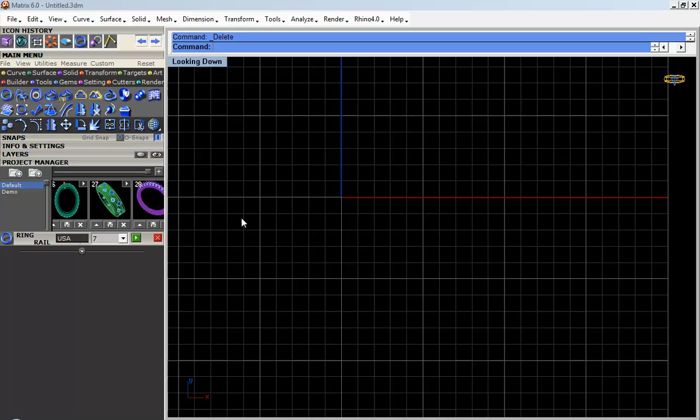Get a rail outside as usual, always a bigger one. This is too big. Alright, no problem. Okay, and one more. That's it.

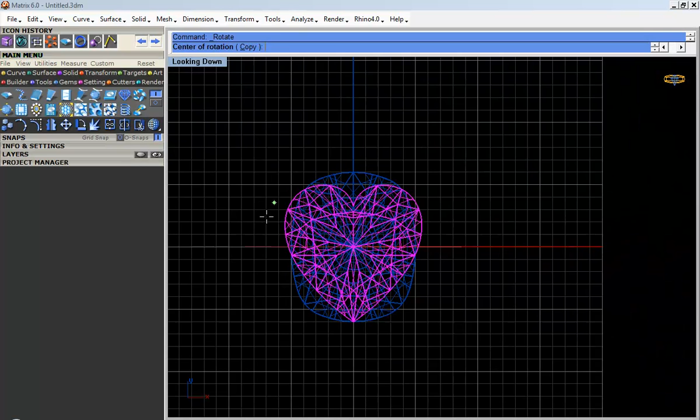He told me you will transfer the machine tomorrow morning. Yeah, in the morning. So for me, I would prefer to go now. I have nothing now, and I finished my job. So I will just get my stuff and I will go. I'm gonna move this.

To send the machine? Rotate them.

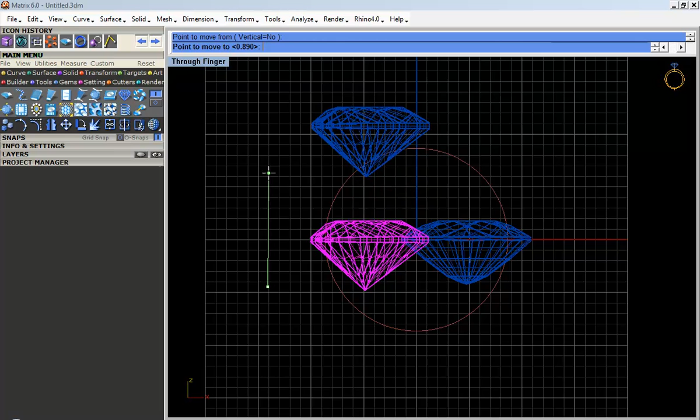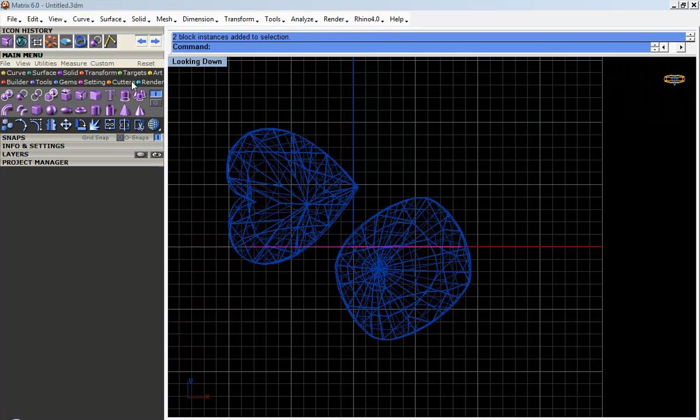I'm gonna extrude them. I heard that he said, what you do? I'm gonna extrude the curve so I can get a guideline, this one also something, like how I'm spacing them equally or not.

Now I'm gonna get a profile curve for this diamond.

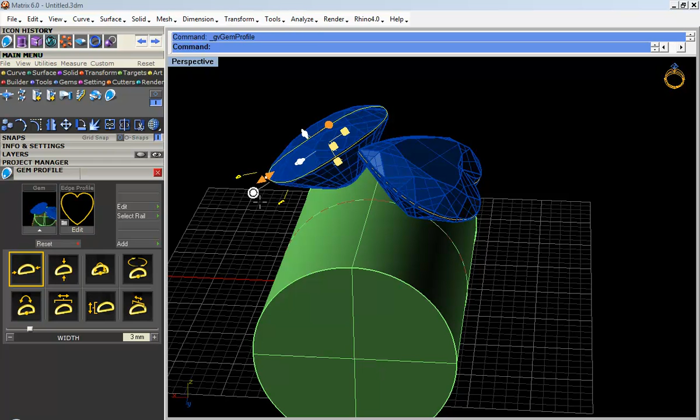So now you're gonna select the curve.

Alright, I got the curve, so I'm gonna select them. Go in view. It's complicated, right? It's much more complicated than that. Yeah, of course, I will say the better.

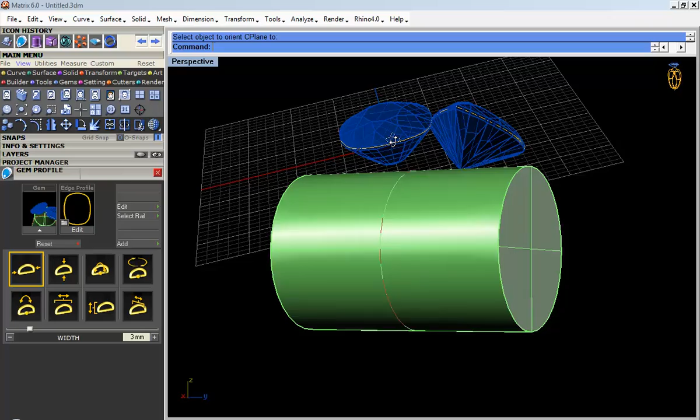Alright, they don't have the command over here, so what we can do is we can go over here. We have this Set CPlane option, yes, okay, and you set through object, set CPlane to object, and I'm gonna select this curve as my object. So what it does is set the CPlane, you see the CPlane has been moved from the middle to the flat object.

Alright, so now I'm gonna select this one. I'm gonna rotate it. It's a very nice thing if you just follow this. You're gonna offset it 0.1. Alright, wireframe, select, offset it outside 1mm, or let's say 1.1, let's take 1mm. That's nice.

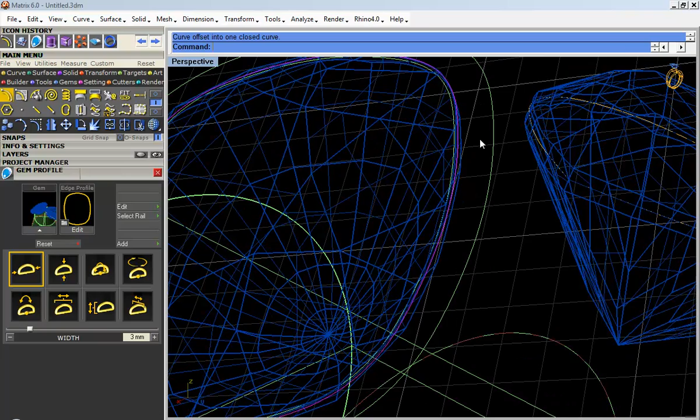Now I've made 2 curves, right? 0.1 inside and 1mm outside. Now I'm going to do the same thing over here for this curve.

Select it, view, set CPlane to object, okay, and now it's going to change the CPlane from here to there. I'm going to do the same thing over here. Offset inside 0.1, enter, and select the inside one and offset outside 1 millimeter. Okay, so you get two curves like this.

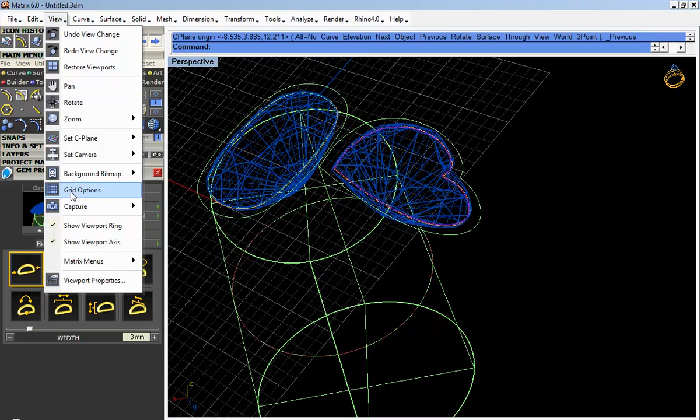Now I'm gonna go in view, I'm gonna go in Set C-Plane, and I'm gonna press this button, Undo CPlane Change. So it's gonna get, yeah, exactly. I'm gonna do it twice because I changed it from here to here and from here to here. So I got this back to the 0 level, and now I'm gonna use a curve.

Alright, and from here I'm gonna use this one. I'm gonna use... alright, I'm gonna select this one, and you see the shank shape, you need to modify them again. Alright, I'm gonna make it half, and now...

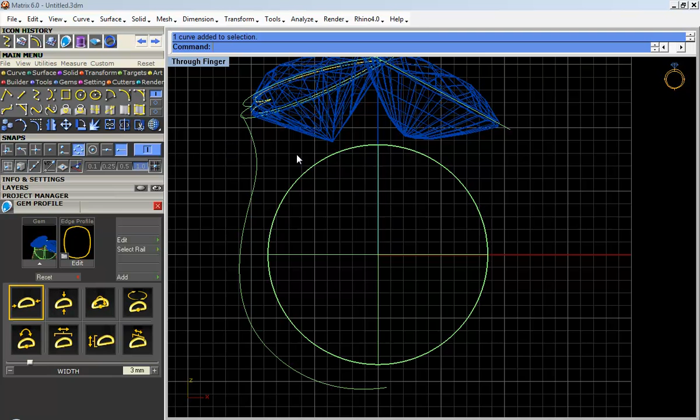Let's use this one and get one outer side one. Yes, so you can use them as a guideline. 1.5, and you can delete them exactly. That's a good idea, you know. You think about it when you just try to make them, and then you get an idea. Let's try this. Alright, so this is nice.

I'm going to use this one, get some points on it, and I'm going to move it to match it. Okay, so the good way to get the shape properly is to get the points on the curve, not off curve. It's better to use this one, so it's gonna get us exactly what we need.

Alright, yes, like this. I think it's good. What do you think? Yes, it's fine.

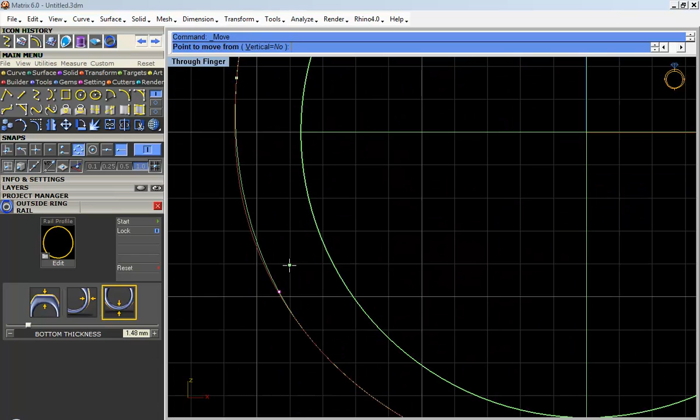Alright, so you have done over here, now escape so I get rid of the curve. I'm going to mirror it to this side, and match this over here, move it to the quad. Alright, something like this, undo.

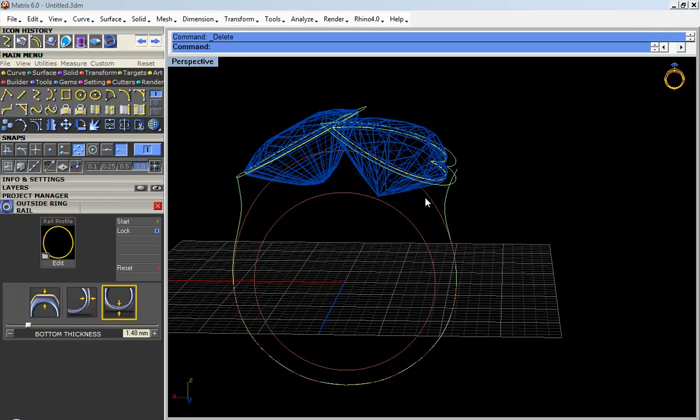Alright, now have a look from here. This is what you got. Okay, so I don't need them anymore. I'm going to select and delete this one. I'm gonna lock it, or let's say I'm gonna delete this one. Doesn't make any sense to have this one. Alright, now...

Select sweep one history, select this, and you see when you do this one, with the history I got something funny, so I'm gonna undo this one, select it, undo. I'm gonna use the normal sweep one, not sweep one history.

Sweep one, select this, and I'm gonna use this option, road like through finger preview. This is because it's taking a turn from here. If you see over here, that's the reason, so not a problem.

What we can do is we're gonna project both of them, select, and say project to CPlane. Alright, this is here, you need to type them, use this view. If you're doing this view, you're gonna get flat because the CPlane over here is like this, and the CPlane over here is like this, so I'm gonna go over here and type no.

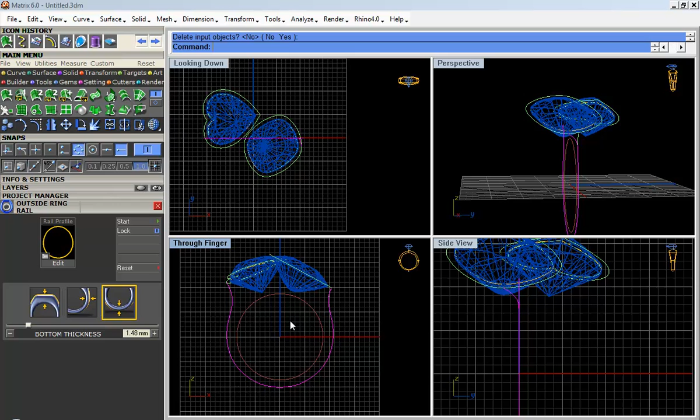Alright, so I've just pressed enter. Type no. Yes.

What is the projection of CPlane? The projection of the CPlane, right now it's not straight. So when it projects to the CPlane it's always planar, you know, flat. So they're gonna make them flat, right? That's what I've done over here. Select them, right click, and say yes.

This time you delete them and you got a new one. You see those are flat, it's flat. If you see them, they were like this, now changed them like this. Alright, now select...

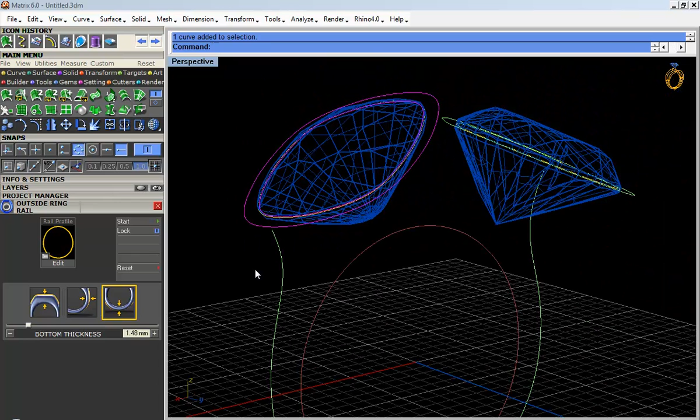This two inside and rebuild them, because I said I don't like the points of the matrix, so I'm going to change it to mine, to 0. Review, yeah, they're looking better. Okay.

Select this and this - oh my god, I didn't see this one. You don't have to get this. How do you select both of them together? Press shift, shift - you press one on one and then you press shift and take the other one, right? Yes.

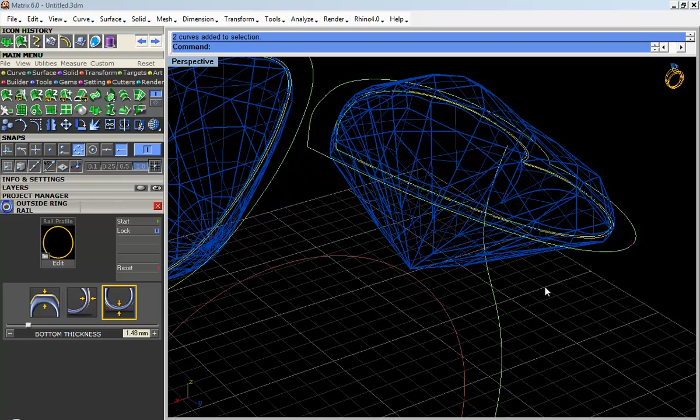Select over here. Okay, now extrude them, because I have an edge over here, so I need to extrude them. If I don't extrude them and if I try to rebuild them, it's gonna get me something very bad shape. So I'm gonna lock all this, lock my diamond, delete this one, the gem profile, and...

You see it's all separated in different curves. So I don't know where is the shortcut of locking things. Locking, Control L. Control L. Huh? Yeah.

Select this section, join them as one. Alright, but seems like it's been joined into two because of this one. Alright, so select this section, sorry, and select. Yeah, select this, you see it's going from edge to edge. It has to be one, edge to edge.

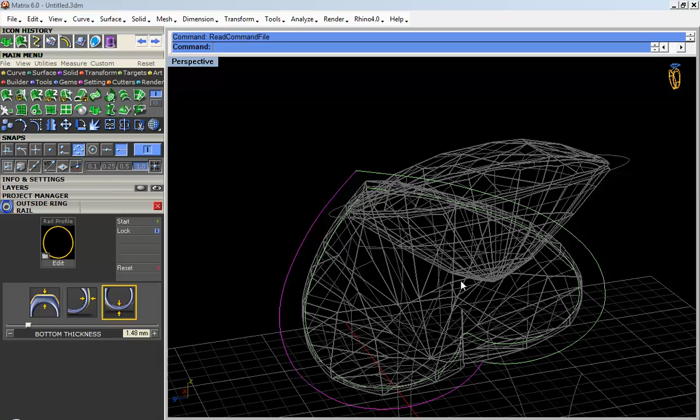Always remember, join them, rebuild them. Sorry, we do the rebuild at the same time. So right now, let me take this as one section, unselect this, select. Yeah, okay, so till here it comes as one. That's nice. So I'm gonna unselect this, I'm gonna make them one.

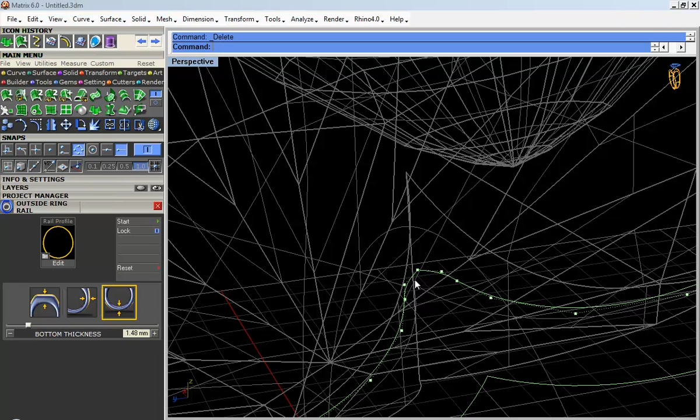And I'm gonna select like this, unselect like this, and join them as one. Alright, so I'll delete some points over here so I don't mess up with them later on. Get some points, delete this too. Alright, I need a sharp shape, that's why I've deleted some points.

So I'm going to do the rebuild for all the 4 curves. Okay, let's take 12 and just see if it changes the shape. Alright, so this is okay, you press OK. You see now it's been changed into sharp, that's why I've deleted these 2 points. Alright, and I'm going to join them as one.

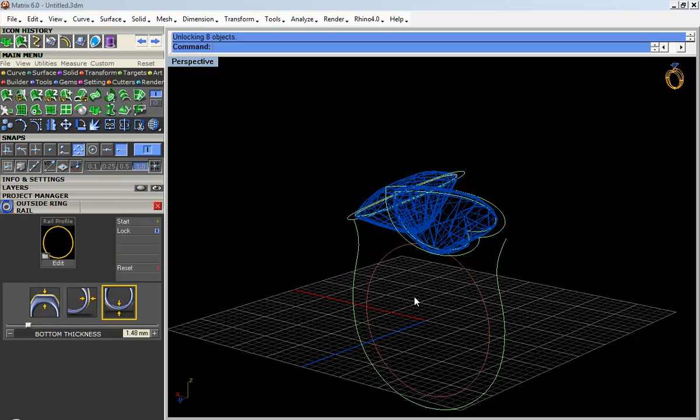Okay, so I've joined them as one. I'm going to unlock my design, everything, and now I'm going to do the sweep one. Select. Alright, so before I do a sweep one, it's good to have...

I need to trim them. Trim. Okay, no good. I'll make one line, curve F4, curve F4, straight, select this one, trim. Alright, delete, join, get some points, or you can rebuild it again with 16.

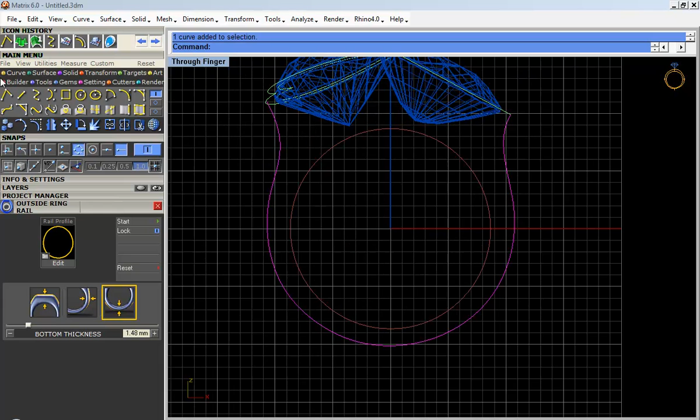Alright, so whenever you do a rebuild, it's gonna smoothen your curve. So rebuild is a good option to do. Curve, get one circle with 2 points, through finger, this view, use the quad, select the quad, and just make a circle with no dimension but a smaller one, because we're gonna need them with the sweep one option.

Surface, sweep one, select here, and then you press enter. Alright, I missed the down one. Select, select, select, and select.

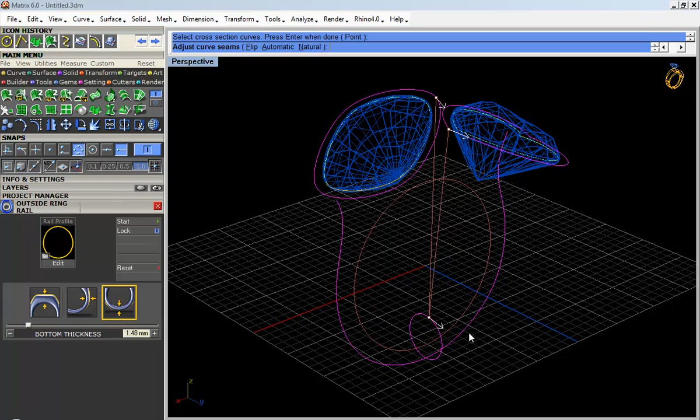Alright, so this is how it's gonna come. It's gonna come in this way, facing this direction. When it comes over here, it faces this direction, and it goes over here, it faces this direction, which is perfectly alright. You're gonna learn them more when you try to do sweep 1 and sweep 2. When you go with the sweep 1 and sweep 2, you understand them more.

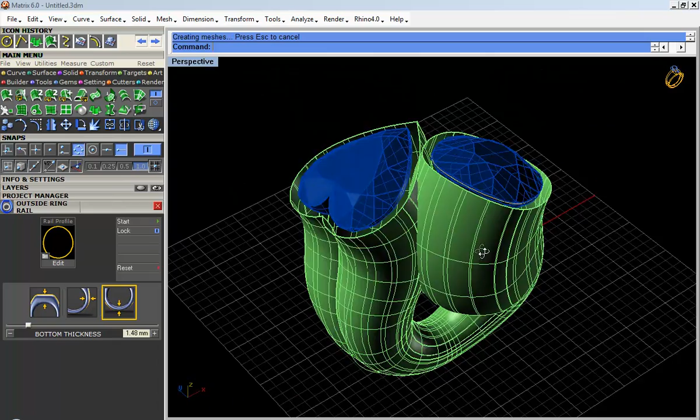So if you think it's not the one which you wanted, you can even do a sweep 2 over here. Alright, but this is not how you're gonna do it. You're gonna cut them like this. So you're gonna have like this one, you see?

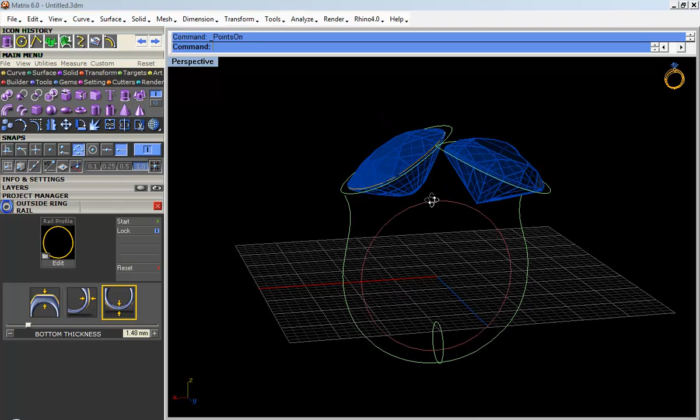Alright, so if you think the shape over here is not good, then what you can do over here is, I'm gonna undo. Alright, and then I'm gonna make a second curve.

Okay, we're gonna try now with the sweep 2. Let's have the other curve. Make sure the points are on. You're registering now? Yeah.

We don't need them. That's a good shape. What's doing now? Yeah, I'm gonna show you.

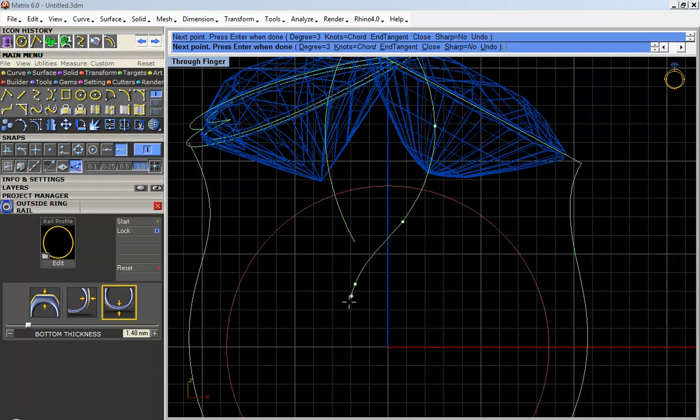I'm making the outer shape for the shank. Different? Yeah.

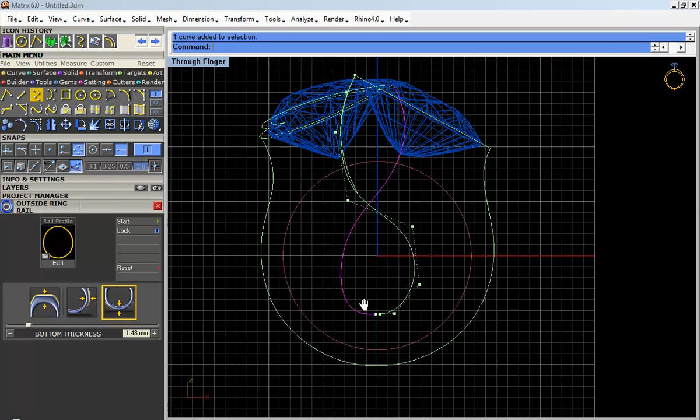Now I'm going to do a sweep 2 for this 2. I can even break them into 2. Select this one, split. So I split them.

Okay, split what? Split this curve. It was 1, so I split into 2. So surface, sweep 2, 1, 2, 3. Select this as 4. Alright, and this is what you get. It's nice. Okay, it's okay.

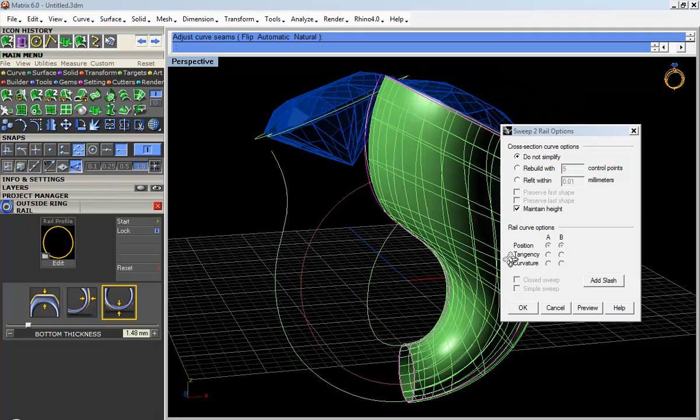If you want to add slash, you can add a slash. What do you mean add slash? Yeah, I want to show you. So this is how it's gonna improve your shape, you see? You press enter.

Alright, I'm gonna do the same thing over here. Select this, select this, and the other one, and this one. Alright, you can see from here you can add this slash. Alright, and that's it.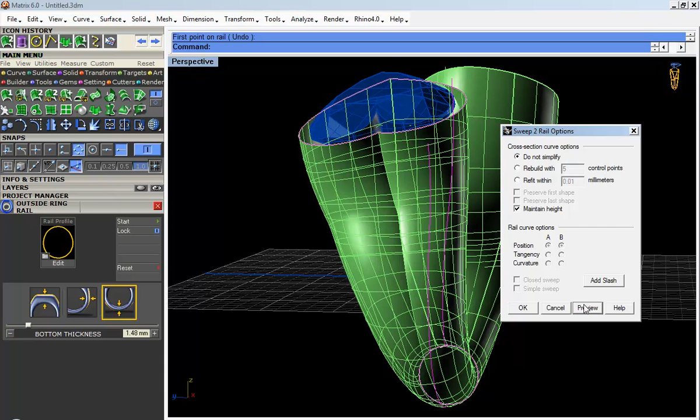Okay, I think adding the shank preview, no. Alright, let me do that again, because when I press the Add Slash, the design was changed a bit. And so I think it's okay if you do not add anything over here. It's gonna be fine. You say okay.

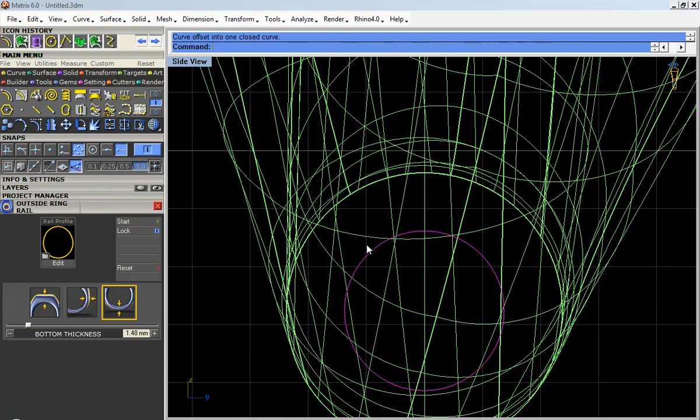Alright, so I'm gonna do the same thing again. I'm gonna offset 1mm, right? Rebuild. You know what, I made a mistake. I didn't rebuild this curve. Alright, I need to rebuild this also, so I don't get them into pieces when I explode them.

So it's as I said always, if there is a smooth surface, the degree should be 3. It was 2, so I made a mistake, so I'm going to rebuild this now. Okay, I'm going to do the sweep 2 again. So these are the things you need to take care of.

Alright, 1, 2. Alright, okay.

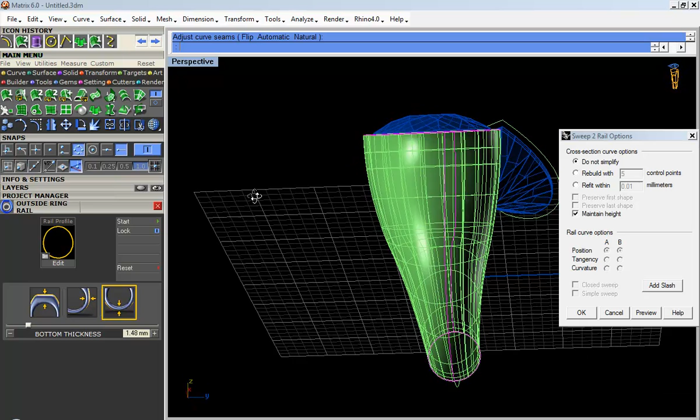Let's try to add a slash. Where do you get that Add Slash from? It's in the option, and it does not... What? Just you pull it, the stuff. You pull it up and down? I'll show you, but it's not going good with the Add Slash. So let's do without the Add Slash.

Select this. Select this. All right.

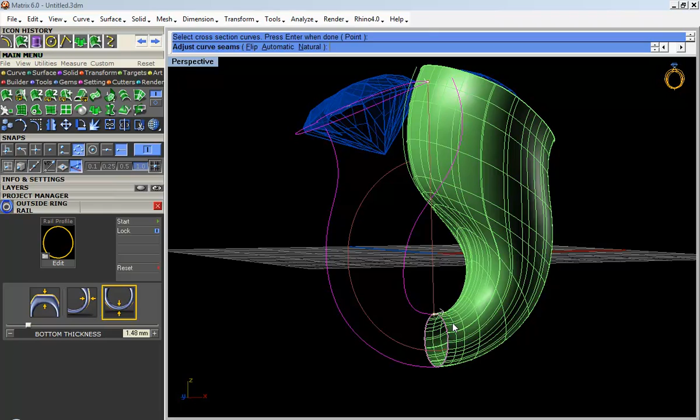Okay, now what I'm going to do is I'm going to get one more curve, offset, curve, offset.

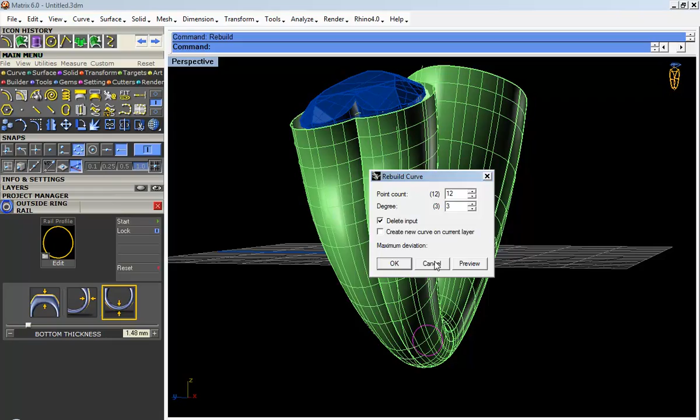Change the layer. You can have more layers down this side. Okay.

I didn't understand that loop that you made inside, for what? Yeah, that's because we have one more curve over here, right? Inside, remember we did the offset inside, so that's why I took this one. So I need one more curve for sweep 2 for this one, this inside one, because I'm gonna do

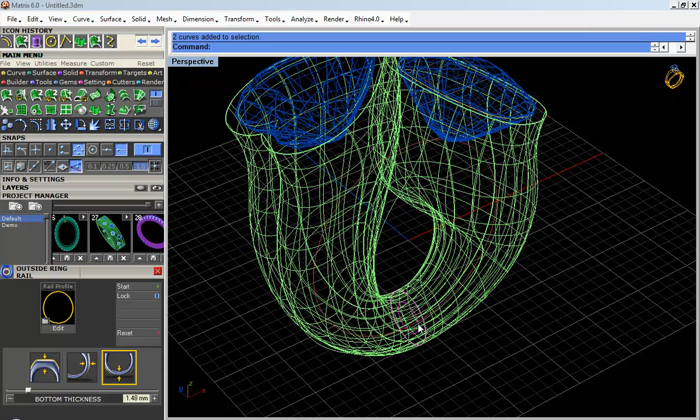again one sweep 2. I'm going to do sweep 2 again, so I need a curve for this one which is inside. So I made one more curve which is inside this one, so they're gonna maintain the thickness of 1 mm. I understand, right?

So sweep 2... Guys, this is your lunch. You select this. Yes, spicy, thank you, thank you. You're gonna select. You want anything to drink? No, thank you. Coca-Cola, later.

Tea, later. Select this one. Which one? The curve.

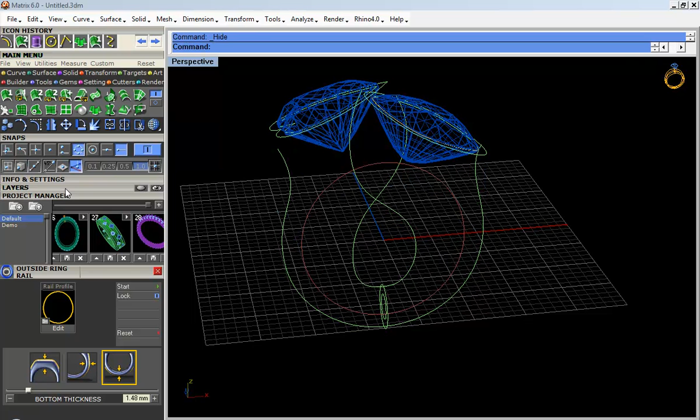Alright, right now I'm getting disturbed because of this, so I'm gonna hide them. With what? Hide. Okay, and then sweep 2, 1, 2,

3. This is my section and this is my section over here. Yes, and I'm not doing anything, no slash or whatever, just okay. Alright, okay, I'll do the same thing over here.

1, 2, 3, and 4, the inside one. Okay, this one. Yes.

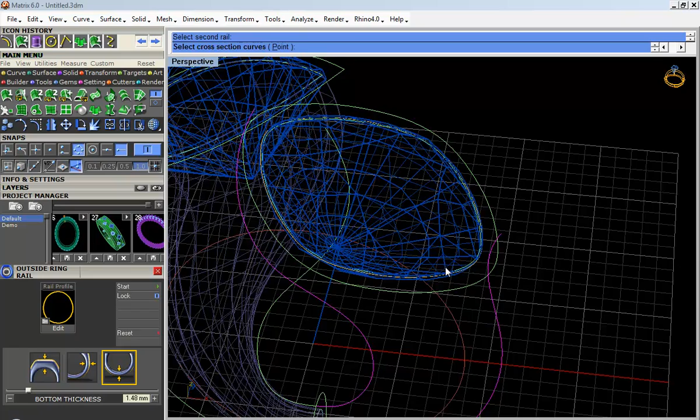It's my mistake, I didn't press it properly. Select this properly, and properly. Okay, you didn't do the okay. Alright,

that's it. Join them together. Join it to what? Join these two surfaces together. With what? With the join over here, with the join.

But you pushed only the thing. Control J, that's the shortcut. Okay, I'm gonna hide my object, my ring. She's over here, and I'm gonna also join them together with this join over here.

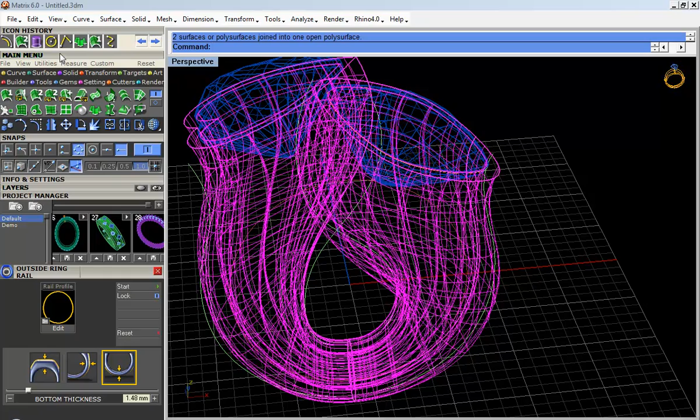Alright, now you can cap it. The cap option. Okay, cap? Yeah, cap this two surface, those were open, you see,

they are open. So I'm gonna cap them.

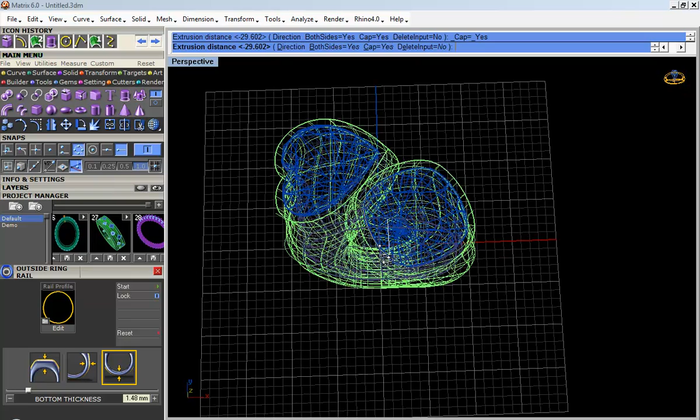Now let's see if this gonna do the Boolean, then it's gonna be good for us. So extruded the curve like this,

select this, yeah, it did, it's good. So now what I'm going to do is I'm going to try to do Boolean on this also.

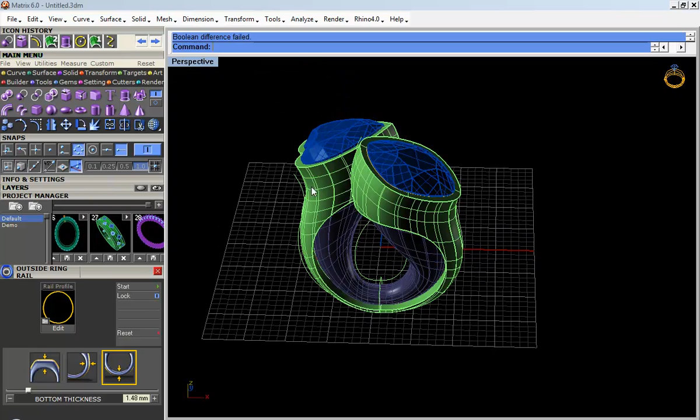It failed, right? Why? That's because this is touching each other, you know, that's the reason. So we have an option.

What I can do is split this into two separate pieces. Okay, that's because one surface is going from here and it's touching the same surface over here, so they cannot be one.

You mean they cannot be separate, there has to be either one or separate. If they are joined together, make this a little bit smaller, it wouldn't do that, like a gap between them, between this and that, the two walls.

If this one... yeah, we need this one because this is the 1 mm offset we did. I know, yeah, no, I'm saying now you cannot cut them, but if we have this a little bit farther from here, like about maybe 2 dcm—no, that's not the reason. The reason is something else.

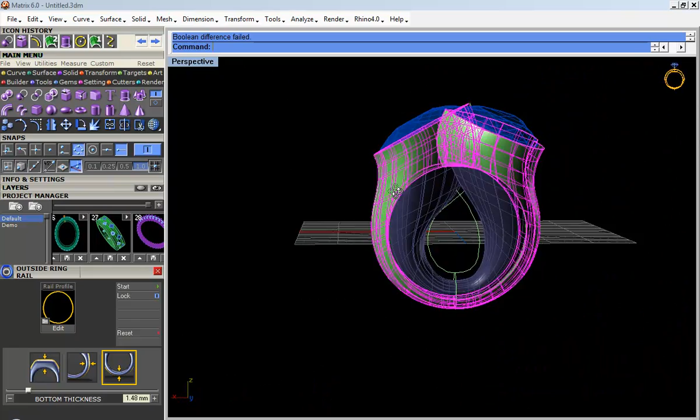That's because this object is one. If it's one, it cannot intersect itself. It has to be union.

Yes, alright, so I'm going to do a Boolean union. For that I need a curve. Alright,

and then I split it. Alright, now they are two different pieces, 1, 2, you see, 1, 2.

Okay, so they're not one now, so I'm going to select them together. Alright,

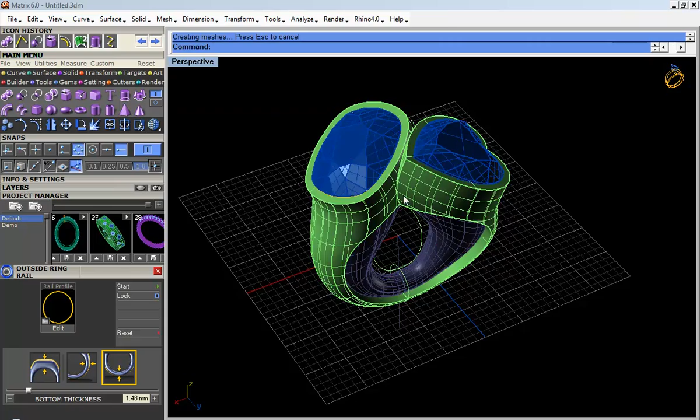then I'm going to do a Boolean union, which is over here, and it's successful now—you see, they are united into each other.

They are not anymore different. Okay, so that's how you're gonna do the Boolean union.

And now I'm gonna try to do a difference, and jingalala, there you go.

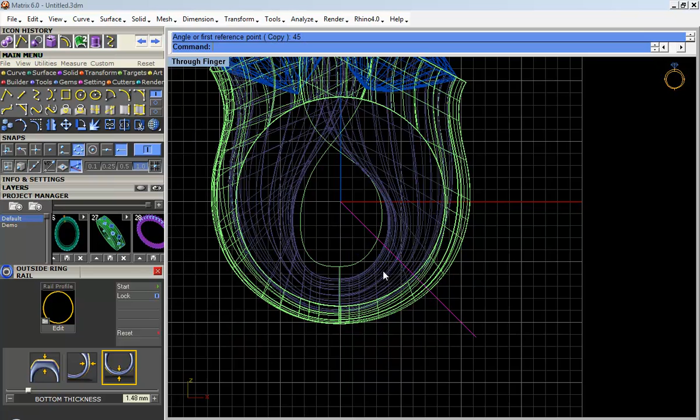But you have this part, the bottom. I know, so there's two ways you can do that. One is the cage edit we always do, or else you can have one curve straight down. Let's say you want to scoop 45 degrees, so you type rotate, center, F4, 45, enter, like this. Now I'm gonna get a nice curve coming out of here. My ortho is off, my O-snap is off, everything is off. I'm gonna make a nice shape following a scoop like this, coming out like this and joining them again. Alright, like this, you see this one? Yes, so it's gonna cut them in this shape.

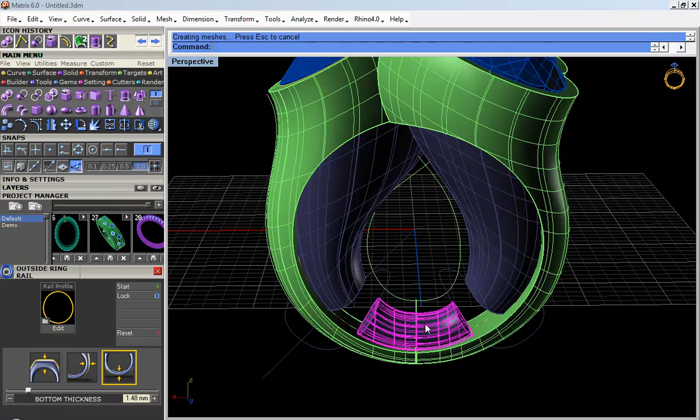I mirror it back, and I've used this line as a guideline. Select this two, I'm gonna extrude them, and delete it. Alright, so now I select them, this two, and that's it. There you go. Okay, now what's missing?

Can we cover this inside? Yes, we can, we can. Okay, can we stop until we eat? Of course, yeah, we're gonna pause this.

Okay, so this is how we scooped it. Alright, it's 1 mm thickness all of it, huh? Yeah, okay.

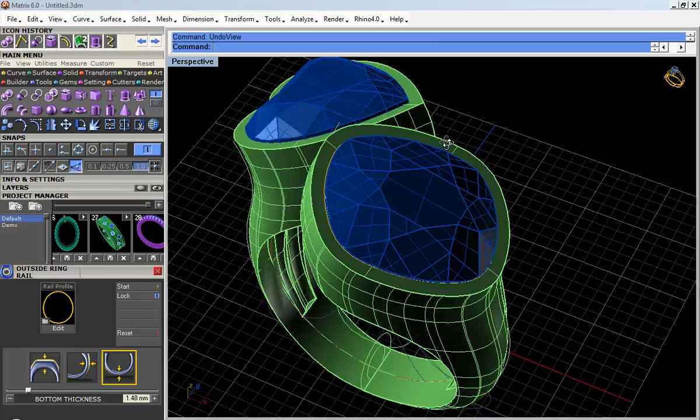Now, looking good. I can make a small section and I can add it over here. What I can do is I can extrude the surface.

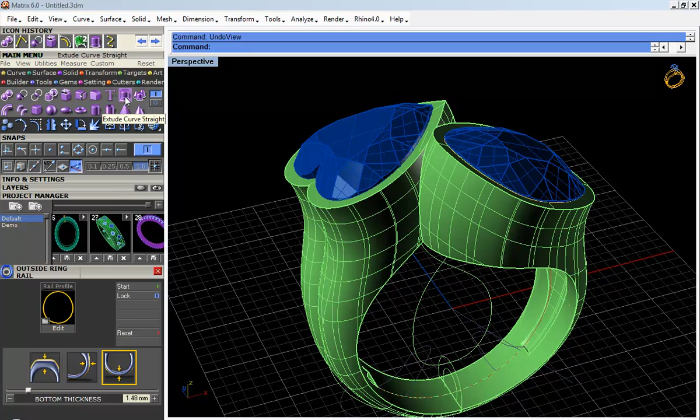What does this do? Go back. What, the second one? This one is the extrude. It's gonna extrude, extrude huh? Yeah, this goes, so it's gonna extrude like this. Outside, okay. Alright. You took it from where? The extrude from which, the orange one? Yes, extrude, and that's it.

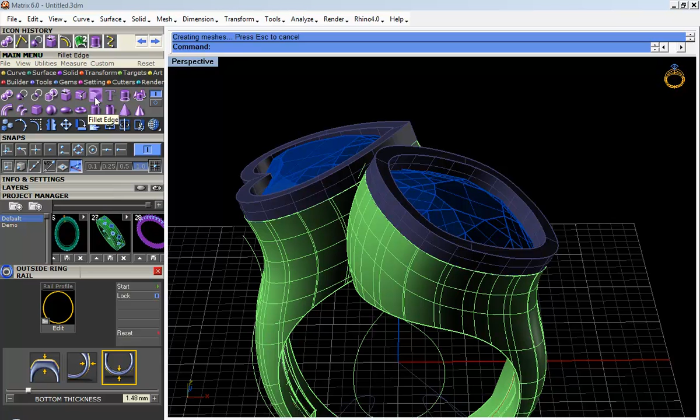Now I'm gonna fillet them. Solid fillet. Select them. 0.45, enter, set all, 0.45, enter. Okay, and get this around it. The same over here.

You right clicking anything? No, left click and shift and select, right click, and that's it. That's it, yeah, done. Now I'm gonna extract the two surfaces which join this two, so I want to make them one. I don't need them two separate. Alright, wireframe, extract.

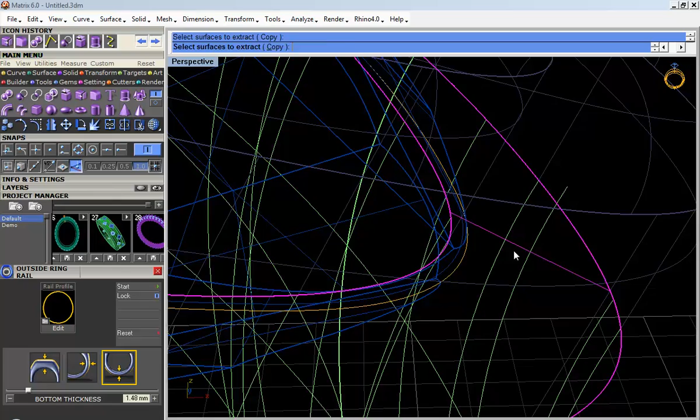Okay, this two, and extract this two, delete. I don't want them like this two, it should be like one. Yeah, I understand, so you extracted the one that you did. Okay, that's it, they are one now. Yeah, you see, it's done and it's good.

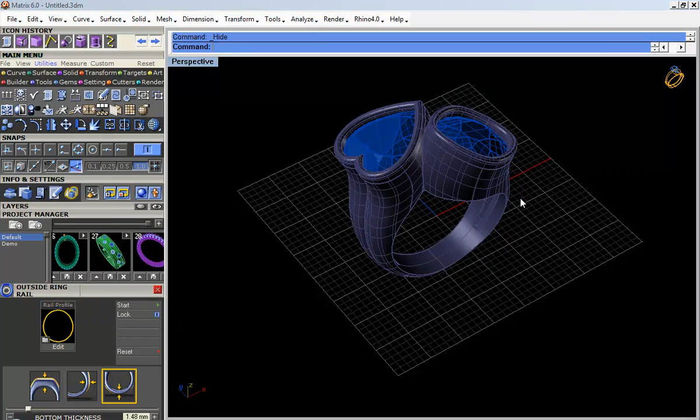So you're gonna select it, you're gonna check them, so this says no naked edges, that means we are perfect. Alright, so I'm gonna select over here, select all curves, I'm gonna hide them, and that's it. Yes, we don't need them.

Okay, alright, now we were about to do the gallery for this one. Okay, so let's do the gallery part. Curve, you need to, let me show this one, I need this one. Okay, the inside, how do you show it? You have the show button over here, click hide, and then you select everything, all those curves, all curve, then you deselect this one because I don't need anything else, so I'm going to hide them back.

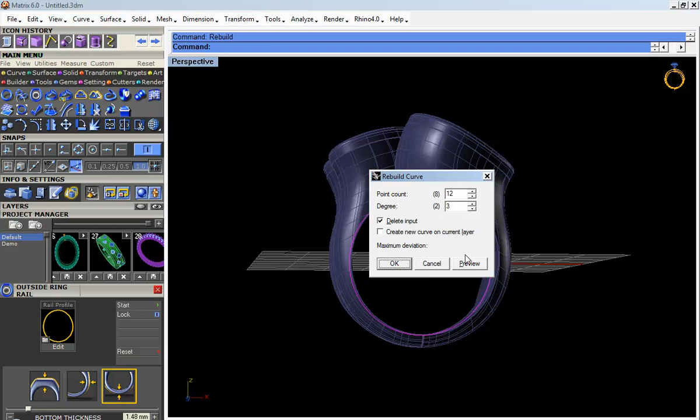Okay, right, so select this, rebuild 12 by 3, then I extrude them both side, cap no option. Alright, cap no, what do you mean? No cap. Alright, so I'm gonna duplicate the borders. What do you mean? I'm gonna make a curve over here. Alright.

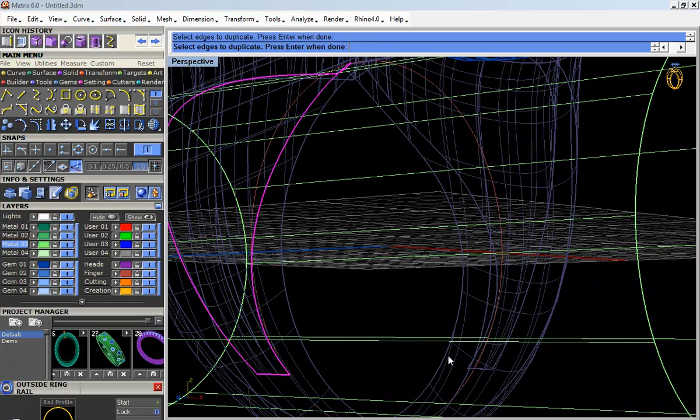You take the regular line, huh? The regular thing, no, this one, duplicate edge, duplicate edge. Oh yeah, okay, join them. Okay, and I log them. Okay, now I got this two curve.

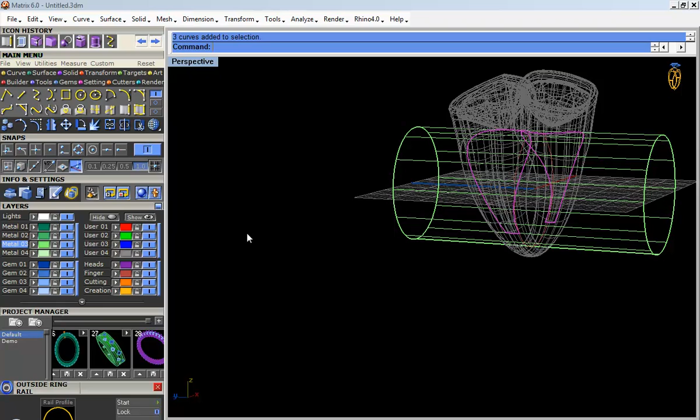Okay, this two, not this one, this array. I got this two curve over here, so I change the color, make them orange or whatever. Okay, so I'm gonna go over here in curve section, create UV. We did this yesterday, we're gonna do that again. Create UV, okay, select them, select this, select this.

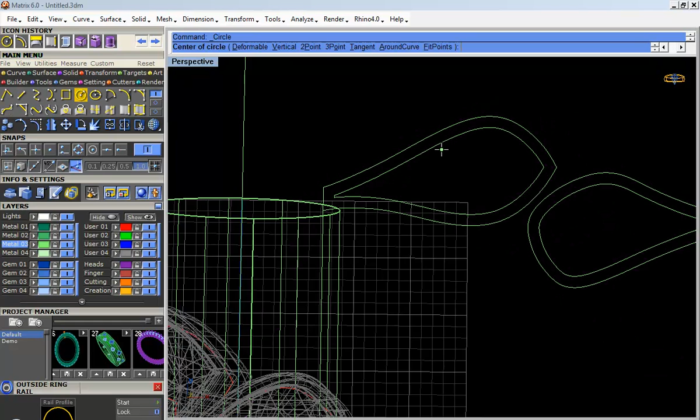And press enter, so you get them unwrapped like this, and now you can make your design. Okay, you design whatever, then how do you take them out? Yeah, you're gonna apply them back to that same position. I'll show you how. You made a, what's the name? Huh? Offset. Offset, okay. Offset to the inside, 0.5 millimeter or 1 millimeter or 0.8.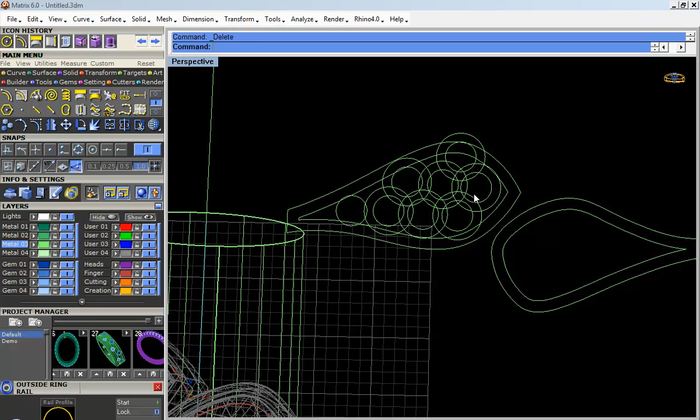Okay, last one, select all. Doing, curve boolean. There's something wrong with doing something. You're just taking the rounds out, right?

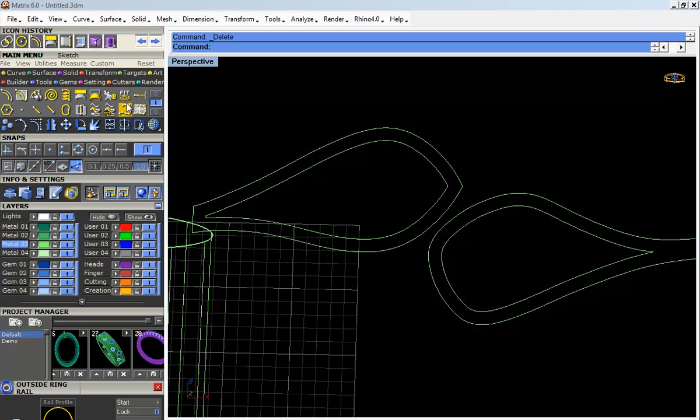Okay, you design anything, okay. Okay, then alright, and take this one. It was going way out. Let's take it simple, don't make it much complicated. It's no problem, forget about the design. Yeah, but I do need some design, you know, so I'm just making one like this, let's say.

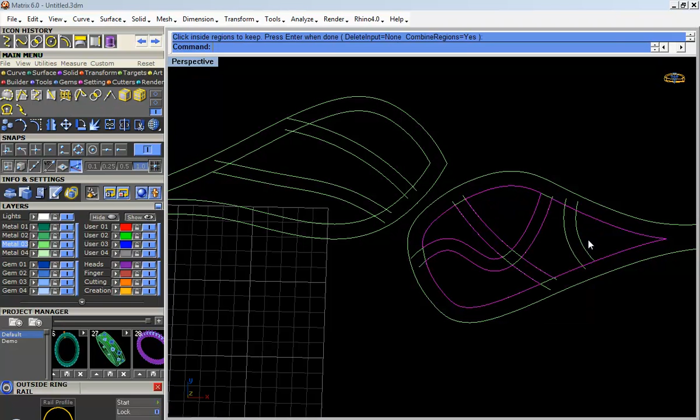What do you do? Select, then use the apply UV curve and put it back on this one. You don't need this one, so you delete them.

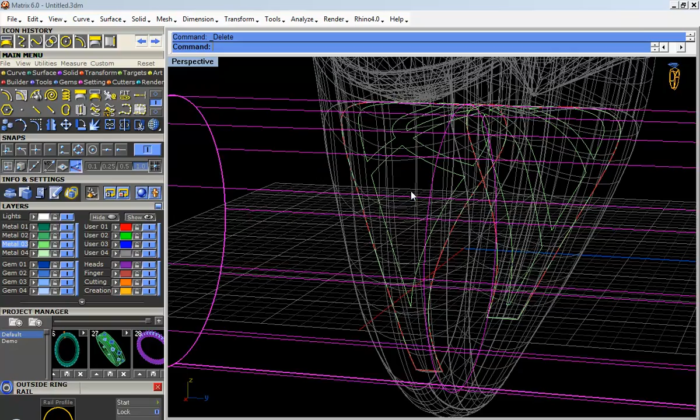Select this surface, and then you split with this curve. A split from which curve? I delete this one. Okay, I got this curve now.

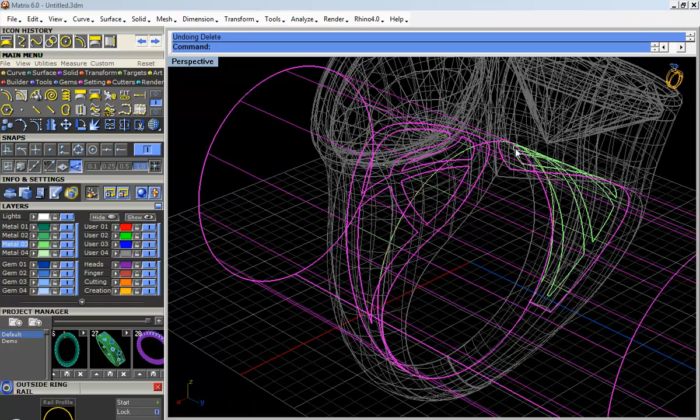Select, split, split with this, delete, delete. I'm gonna delete all this thing which is inside. Let's say I select only this two. Oh, I did the split with this curve too, so I need to undo this. I need to hide this. I don't need to select them. That's why I got a crack in this middle.

So I split again with this. Then I unselect this and I unselect this, the inner one. Control and unselect the inner one, which is this one. And I delete everything, and then I get like this.

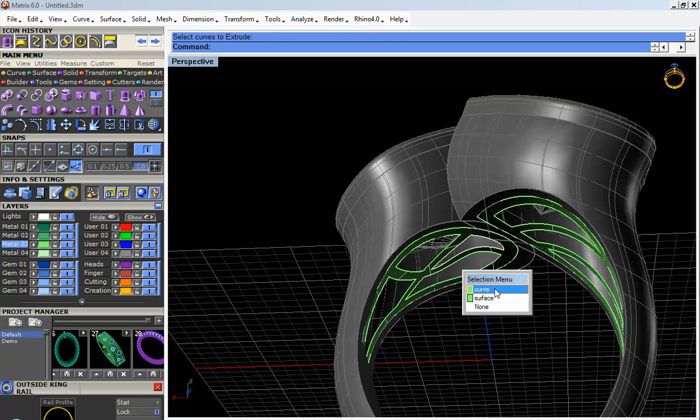Nice, right? And then you select them and you extrude them, you offset them. Why do you offset them? Because it doesn't have any thickness. Ah, okay. So here's the offset option, with the solid option. Yes, and that's it. You see?

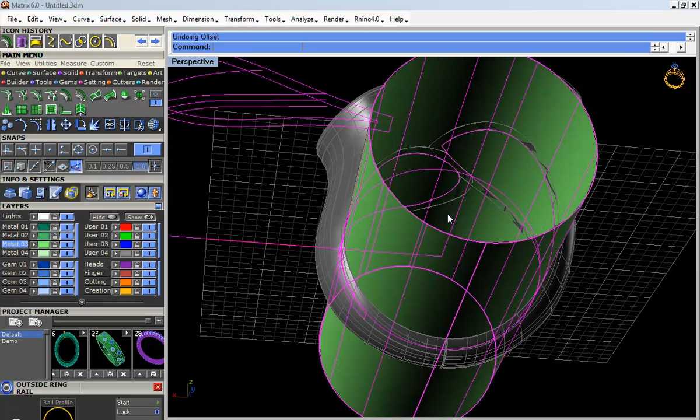But this one over here, it's going inside to this. So what we're gonna do over here is we need those solid objects which we use to boolean this to. So what I'm gonna do is undo. In this case you need to save them. You see this one, this two, the inside object, I need them now.

Really? Yeah, so I'm gonna copy them, and press Control Y to redo everything. I did the undo option to go back, now I'm gonna do the redo. I got everything now till over here. Control R, Control redo, Z for undo, Control Y for redo, and now I'm gonna paste it. Okay, I got them back, I went to the history and got them over here.

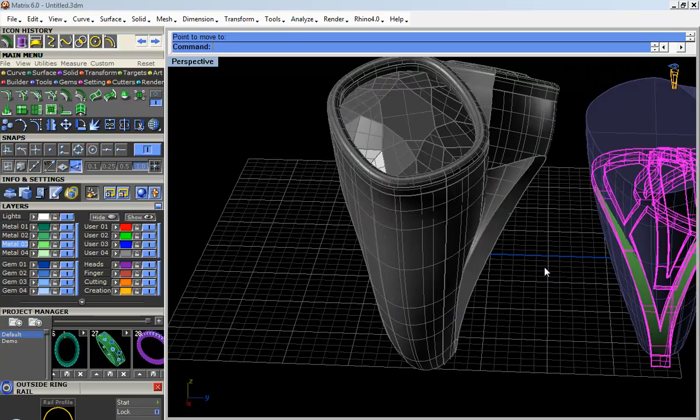I moved them. Ortho on 20, enter, along with this two. Do you see? So these are my extra metal, which I don't want, so I'm going to use surface intersection.

You know it's gonna fail, but let's try. You see, it failed, boolean intersection failed. So how thick did you make that thickness? It's 1mm, it's very thick. Yeah, so you can reduce it to 0.6, 0.5. Yeah, so 0.6.

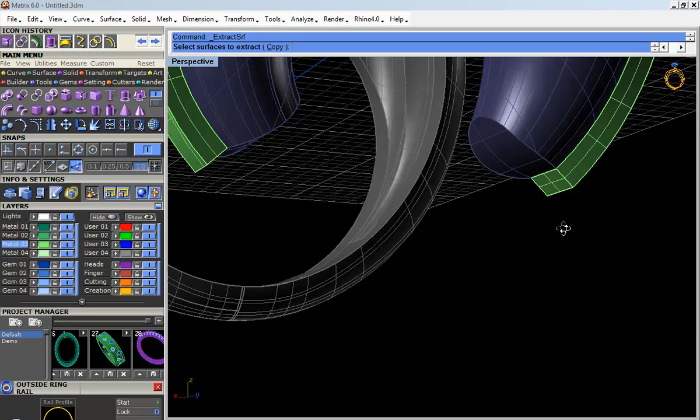So what you can do is go in solid, extract them, and try to make a new one, but delete this one, and I go in surface and untrim them, this surface, so I can have them back. I also trim this, untrim it, I cannot see from here. Untrim. Alright, now everything is untrimmed.

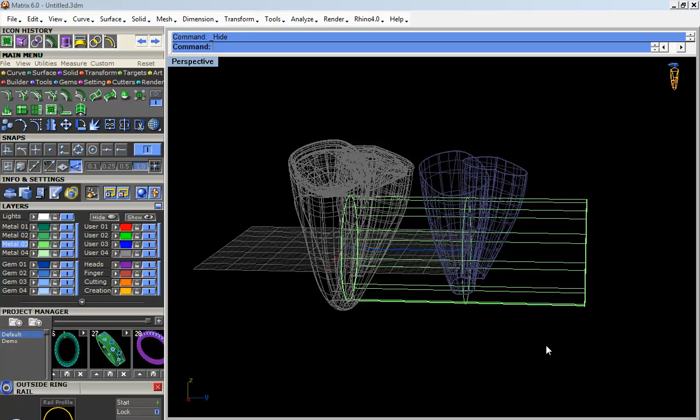Alright, now hide this curve. I'm gonna untrim, hide those curves, and now I'm gonna offset this one, surface offset with the solid option. Yes, flip it 0.6 as you said.

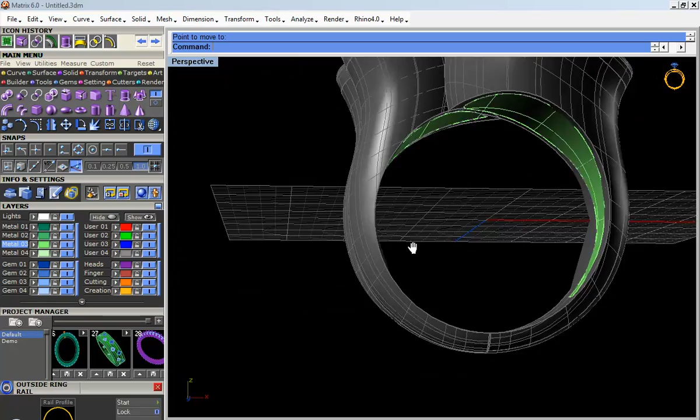Alright, and now I'm gonna do an intersection, solid intersection with this too. So now you see this is perfect, it's gonna be perfectly close. Well, wait a minute, that's because there is no metal over here. Alright, so yeah, this is how you're gonna get it. It's perfectly 0.6, and now you move them back to 20mm. There you go, see, now you can design anything over here.

Alright, that's how this design has been made. Do you want to do the rendering for this one? Rendering? Should I? No, it's fine. No, we'll just wait, we just save it, and we go on to the next one.

Go for the next one. Alright, fine. Select all, and I'm gonna put this in my job bag. That's it.